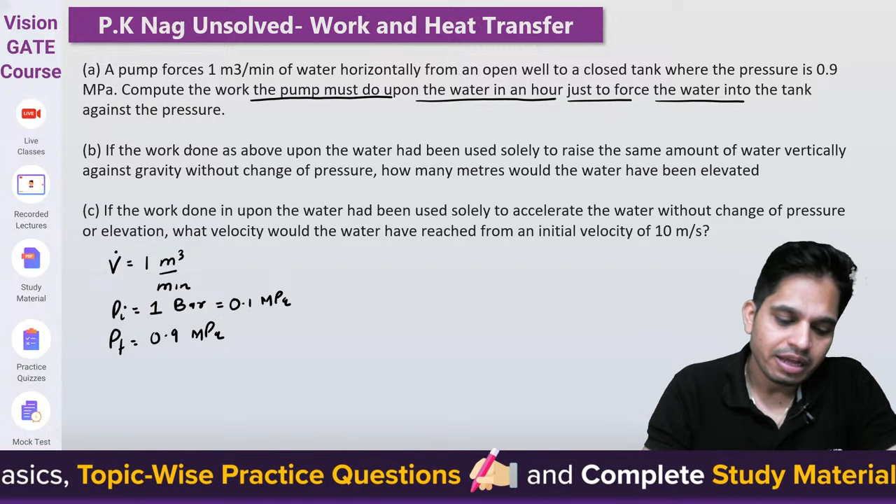First thing, second thing: instead of pumping it horizontally, if we are pumping it at a height, if the work done as above upon the water had been used solely to raise the same amount of water vertically against gravity without change of pressure - pressure remains same at 0.9 megapascal - so how many meters would the water have been elevated? Second question.

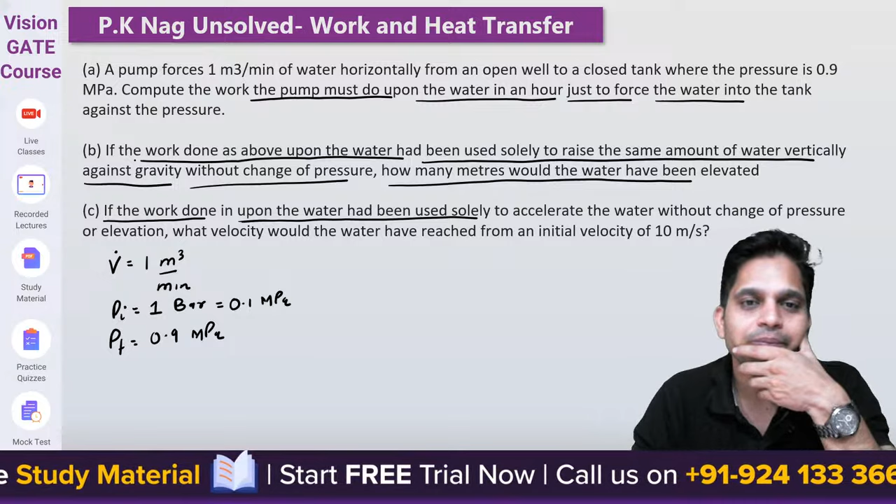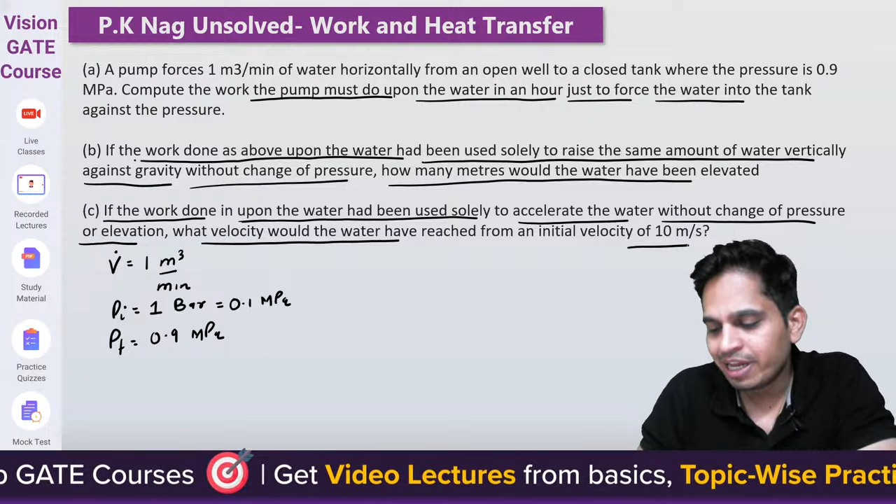Third, if the work done upon the water had been used solely to accelerate, that is you are increasing velocity only, without change of pressure or elevation - that is now you are not changing horizontally, you are not going vertically, you are giving all the work for increase in kinetic energy - then what will be the final velocity if initial velocity is 10 meter per second. So let's try to do the question one by one.

Okay, first part, A part. Volume flow rate is 1 meter cube per minute and initial pressure is 0.1 megapascal and final pressure is 0.9 megapascal.

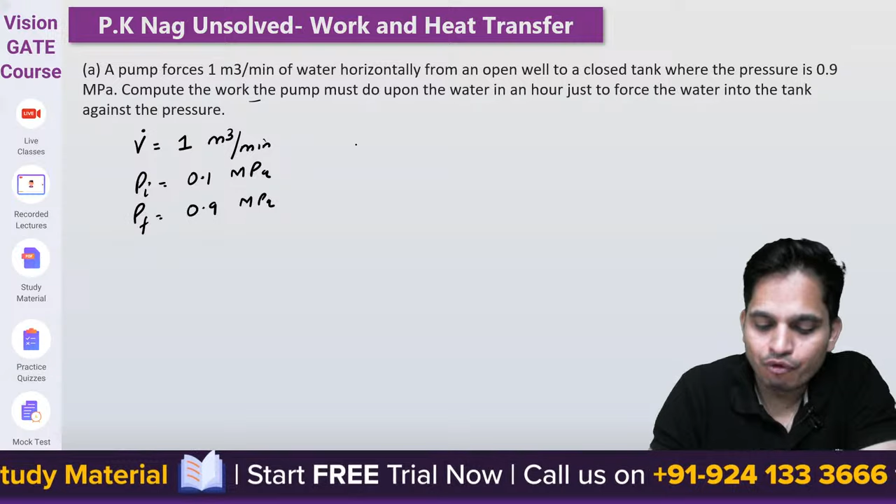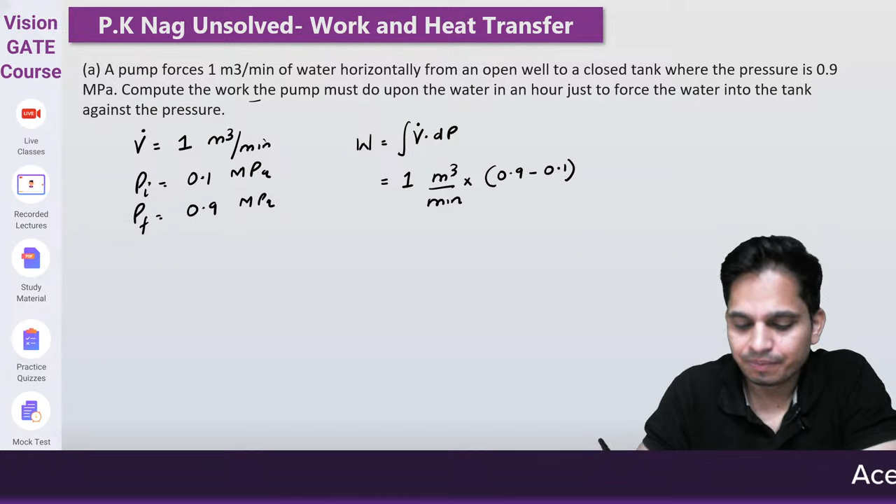Now if it is volume flow rate, so it will be in kilojoule per minute. Now, when we integrate, volume remains same, volume flow rate is same. So I can say it is 1 meter cube per minute into 0.9 minus 0.1 into 10 to the power 3 kilopascal. Calculate how much is this - it is 0.8 kilojoule per minute.

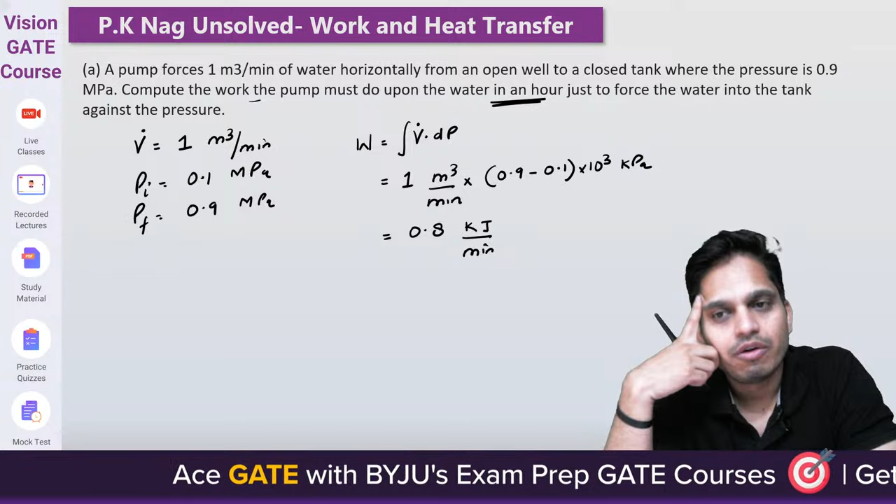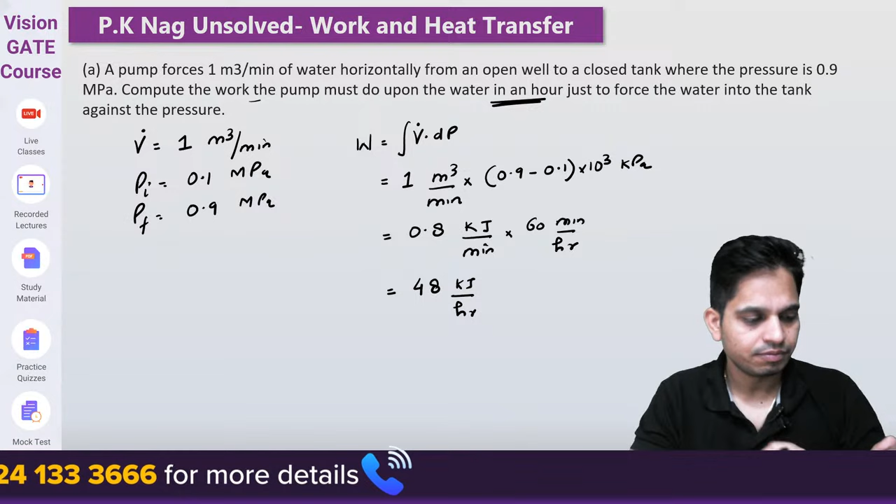But they are asking in an hour, that is, in 1 minute this much work you need to give. How much work you need to give in 1 hour? So into 60 minutes per hour. So you can calculate 48 kilojoule per hour. 48 is what we'll get, right? Yes or no? Yes, 48 kilojoule per hour.

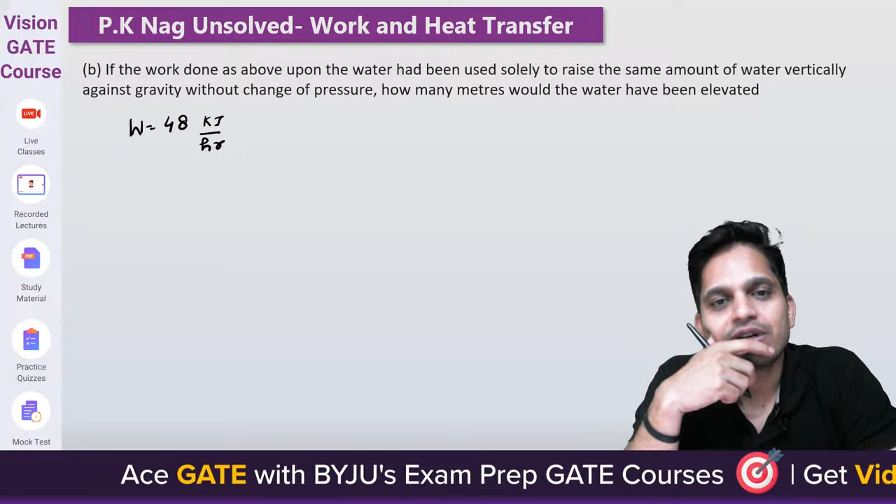Now the same work, that is work is 48 kilojoule per hour. 48 kilojoule per hour. For 1 minute, 0.8 into 10 to the power 3, this is 800, into 60.

48 into 10 to the power 3 kilojoule per hour.

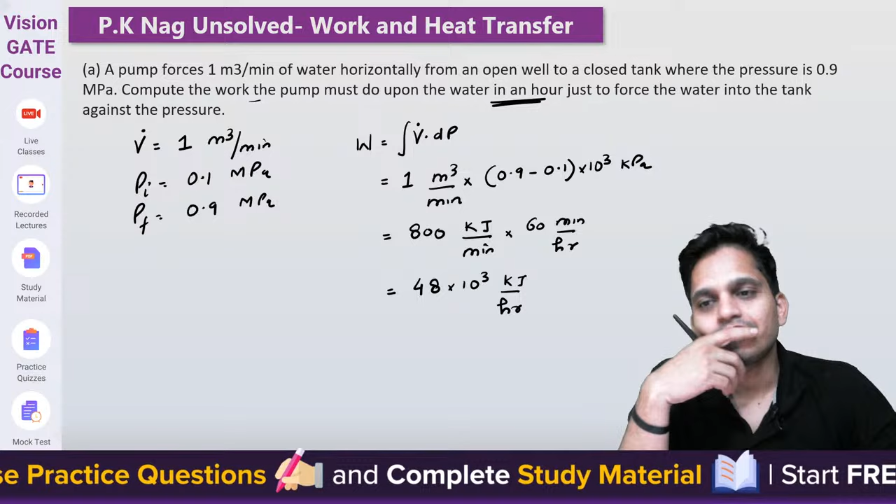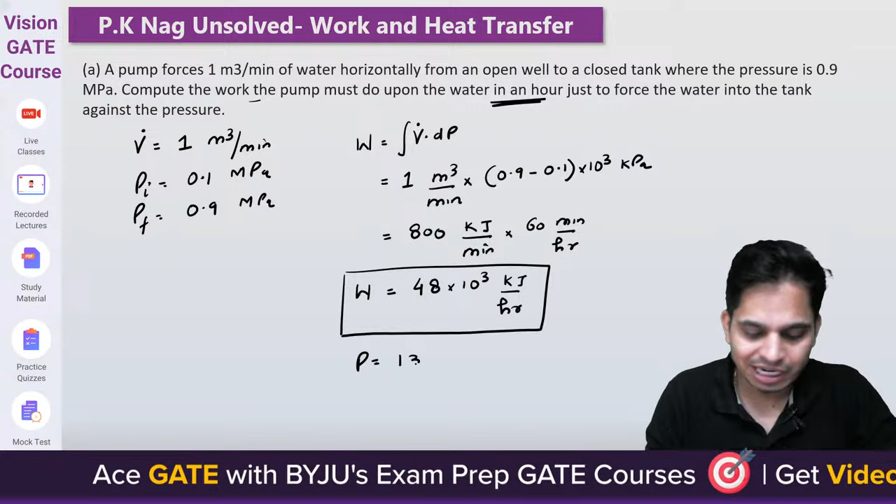We can find out kilojoule per second as well. How? Just divide by 3600. So they are asking this. But to calculate power, power is always in kilojoule per second, that is kilowatt. So it is 13.33 kilowatt. Power is 13.33 kilowatt.

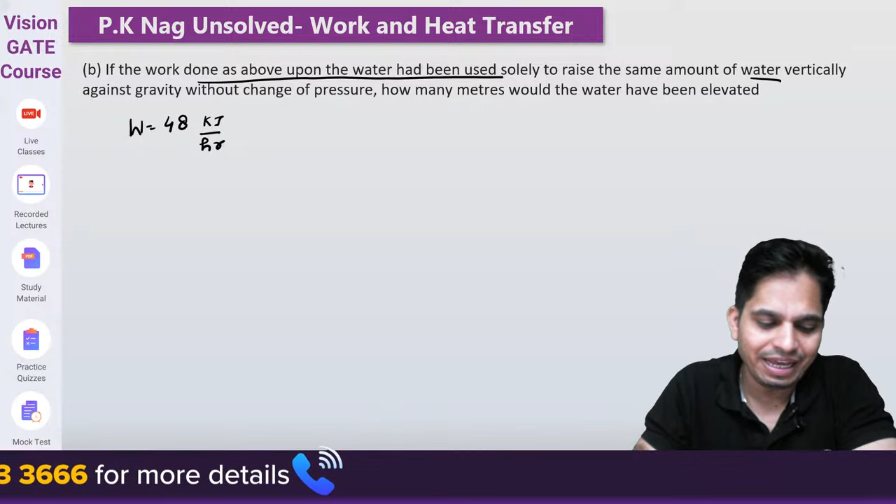Now, if the work done is given upon the water had been used solely to raise the same amount of water vertically against gravity without change of pressure, how many meters of water has been elevated?

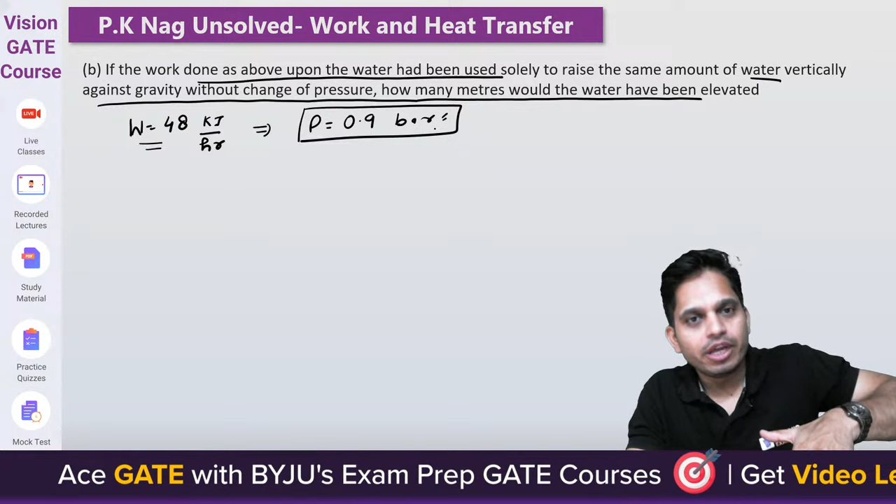This work I have given to raise the pressure to how much? Pressure to 0.9 megapascal. So now what do I have? I have 0.9 megapascal of pressure. The work is converted to pressure, right? I have given this work to convert into pressure. So this pressure is equivalent to what height? How can I calculate this?

P is equals to rho G H. P is 0.9 into 10 to the power, it is megapascal, right? Ten to the power 6. Density is 1000 into 9.81. So you can raise to this height. Calculate what is this height.

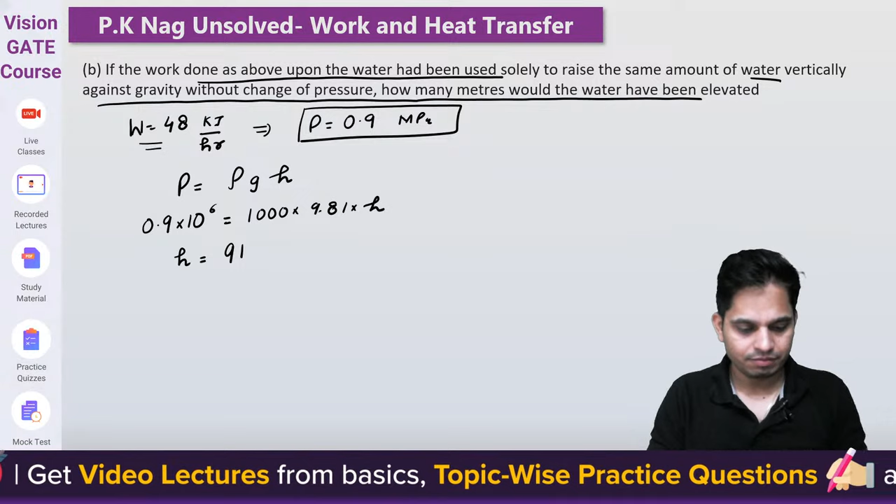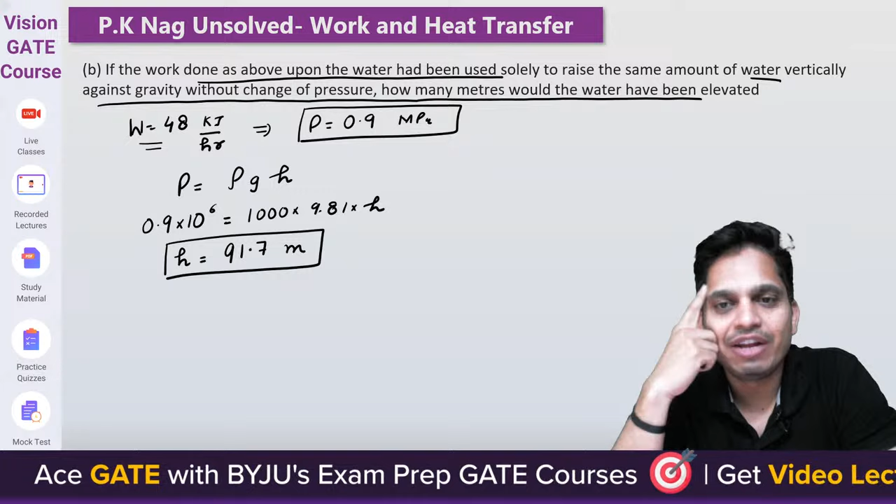Is it 917 or 91? It is 91.7. So the same work can be utilized to increase the height to 91 meters.

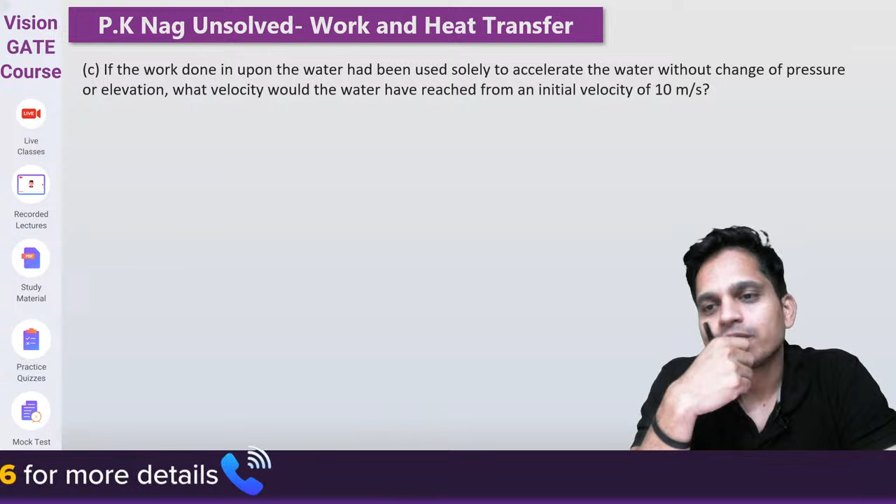Now, if you are giving the same amount of work to increase the velocity, then what will you do? By the same amount of work, you are going to increase the velocity. So what is kinetic energy? Kinetic energy is equals to m into v2 square minus v1 square, by 2.

Now I am giving this work to convert into kinetic energy. I am going to increase the kinetic energy by using this. So work is what? Can I say work is V delta P, and what is mass? Mass is density into volume.

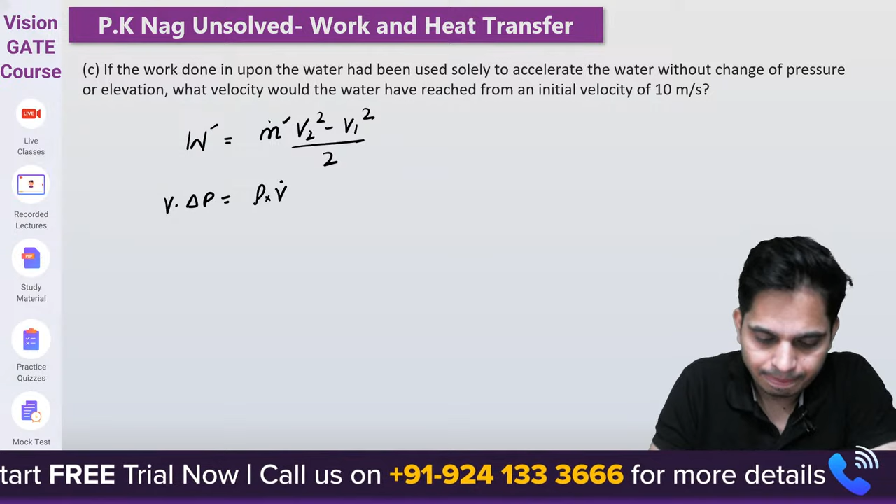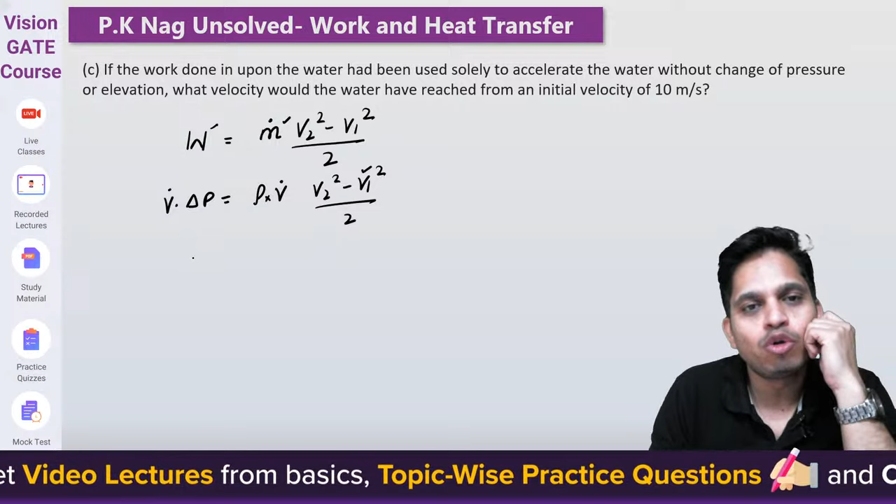V2 square minus V1 square by 2. Now V1 is given to me. I need to find out V2. Or you can directly write down work, no problem, whatever you want. Here I just want to cancel it. That's why I wrote it like this.

Now delta P is 0.9 minus 0.1 into 10 to the power 6 is equals to 1000 into V2. I need to find out V2. V1 is given as 10 meter per second. Calculate V2. How much is V2?

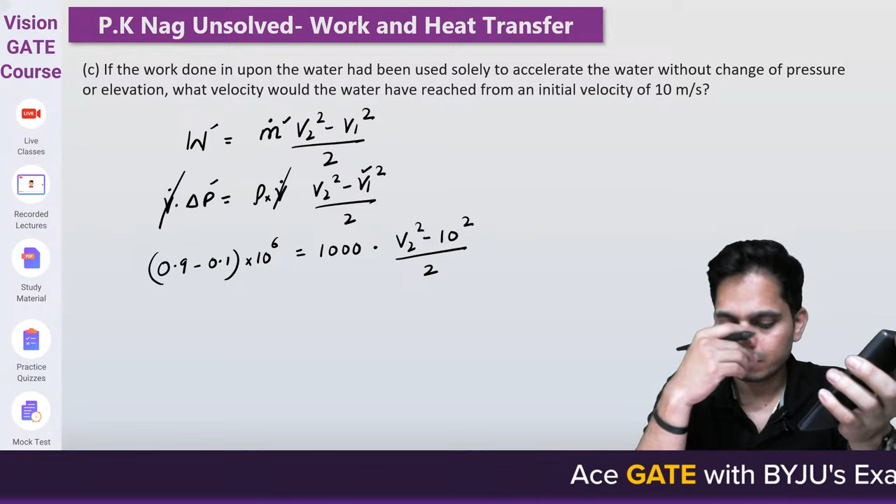It will be ten to the power 6, because velocity is in meter per second. So whenever velocity is there, you need to take pressure into Pascal. Otherwise, if you want to take pressure into kilopascal, then you need to divide velocity, like here it is 2, so you need to do 2000.

Got it? What is the answer? What is the velocity? I am getting 41.23 meter per second. Are you getting this?

This is right, I have calculated it just now. I have calculated 41.23. Same equation I have put. Just recalculate it again.

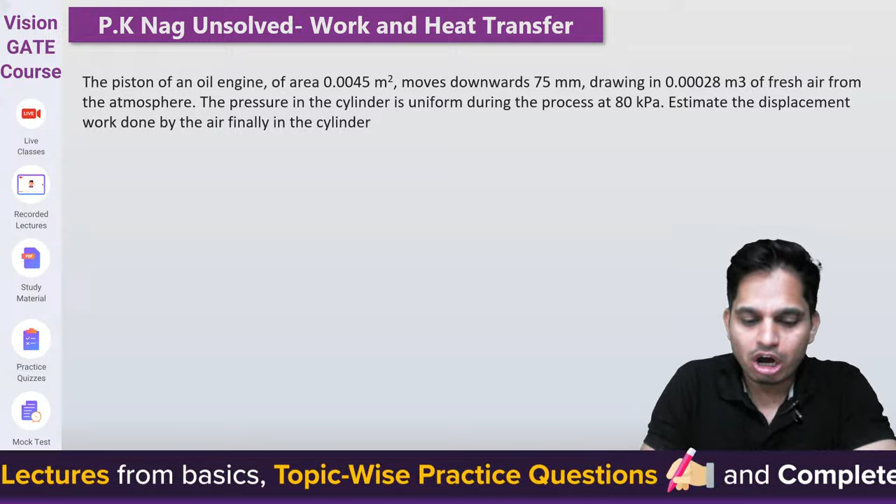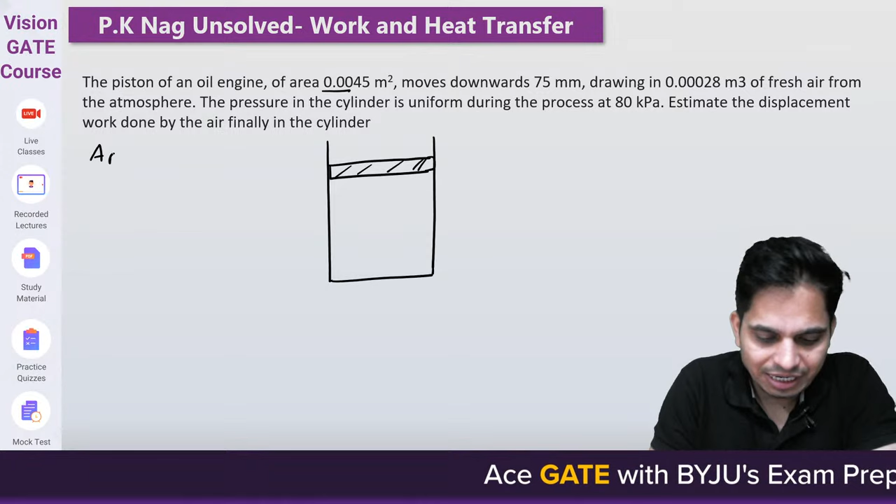The piston of an oil engine of area... So I have an engine, and I have a piston. The area of this piston is 0.0045 meter square, and it moves downward.

Yes, you can directly put it, you can directly put it. Then just you have to put volume flow rate here. That's all, I wanted to cancel volume flow rate, that's why I just did that. You can directly put work, yes of course you can put.

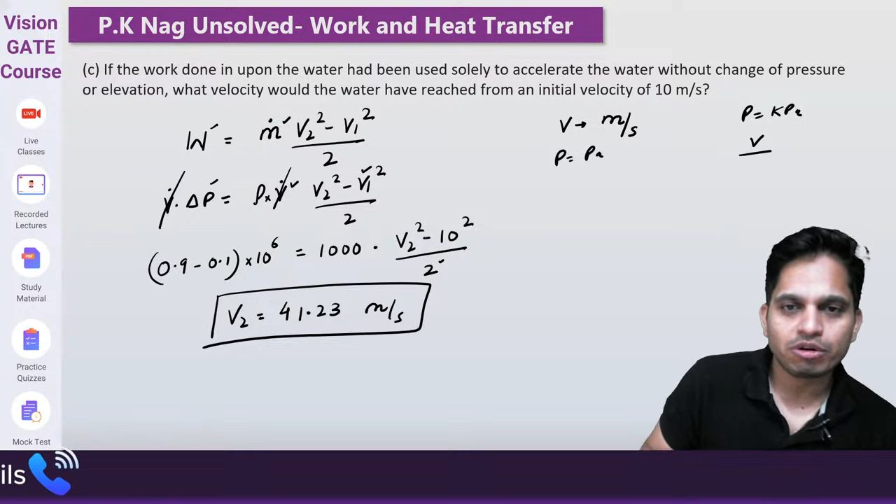Now, it moves downward to 75 millimeter, so it comes here. So travel is how much? 0.075 meter, drawing in 0.00028 meter cube of fresh air. How much volume has entered? 0.00028 meter cube from the atmosphere.

The pressure in the cylinder is uniform, pressure remains same. Pressure is equals to 80 kilopascal. Estimate the displacement work done by the air finally in the cylinder.

I have no knowledge of that, Anu. I am sorry, I have no knowledge of board of trade. I really don't know.

Okay, let's discuss what we are discussing. Now...

So they are asking about piston displacement work. Do you all know what is piston displacement work? It is PdV, PdV.

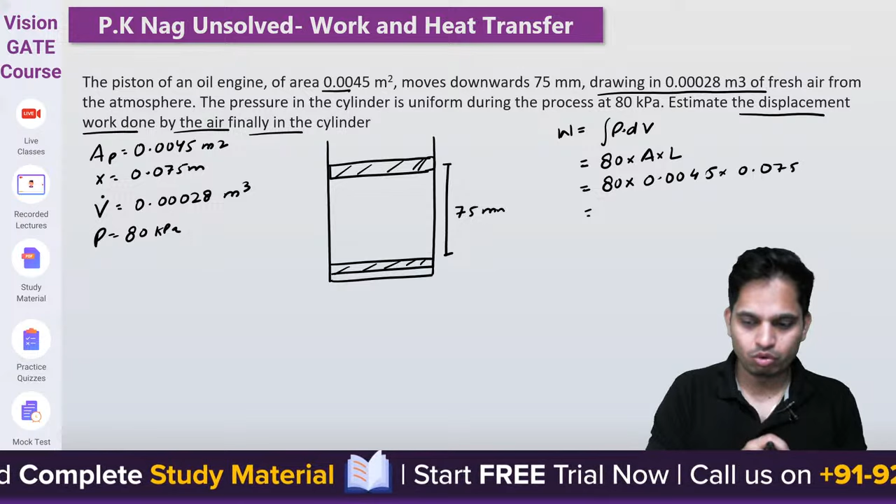And what is the change in volume? Pressure is 80 kilopascal. Change in volume is area into length. So 80 into 0.0045 into 0.075. If you calculate that, you get 0.027 kilojoule, which is the piston displacement work.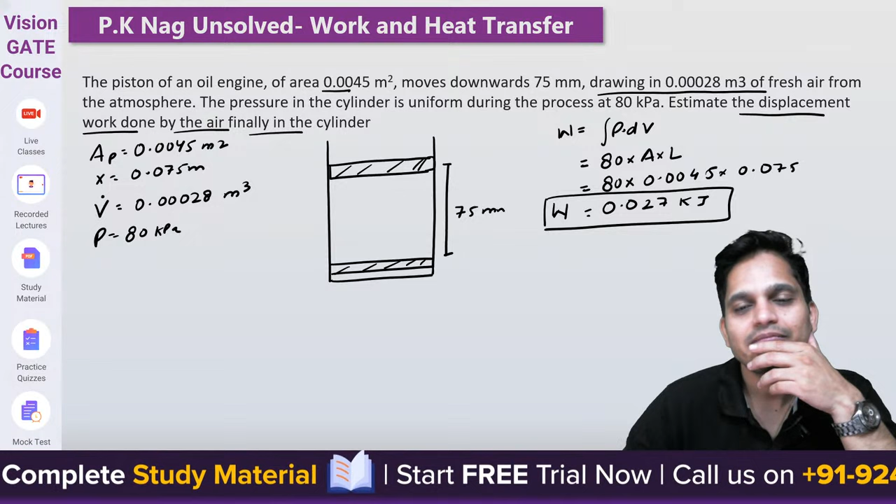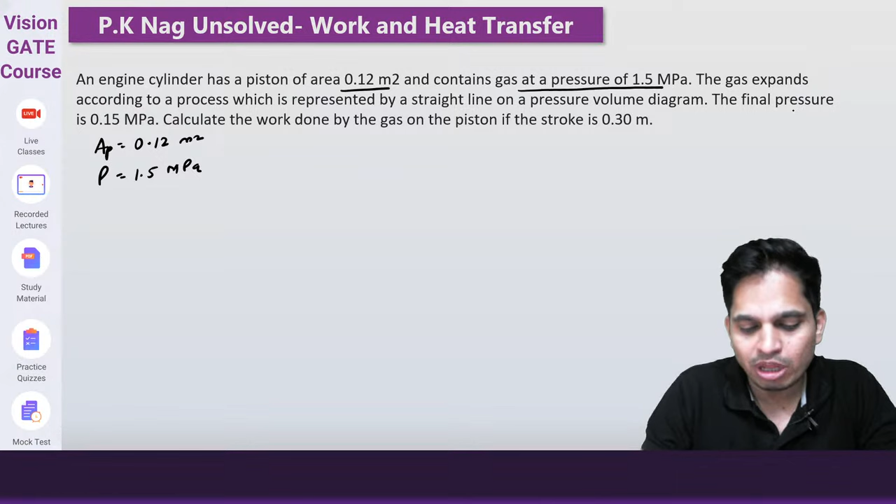Let's go to next question. An engine cylinder has a piston area given as 0.12 meter square and contains gas at a pressure of 1.5 megapascal. Now the gas expands according to the process which is represented by a straight line on a pressure-volume diagram. So this is P1, and your final pressure is 0.15 megapascal.

And how are you going from this to this? You are going from P1 equals 1.5 megapascal to P2 equals 0.15 megapascal. This point you are going by a straight line. Yes, 0.027 is the correct answer for the previous question.

So this is your initial pressure and this is your final pressure. Now the gas expands through this. Now they are asking, calculate the work done on the piston if the stroke is 0.3 meter.

Stroke means length, that is change in volume. So change in volume will be area into length. Area is 0.12, length is 0.3. What is the change in volume? It comes out to 0.036 meter cube.

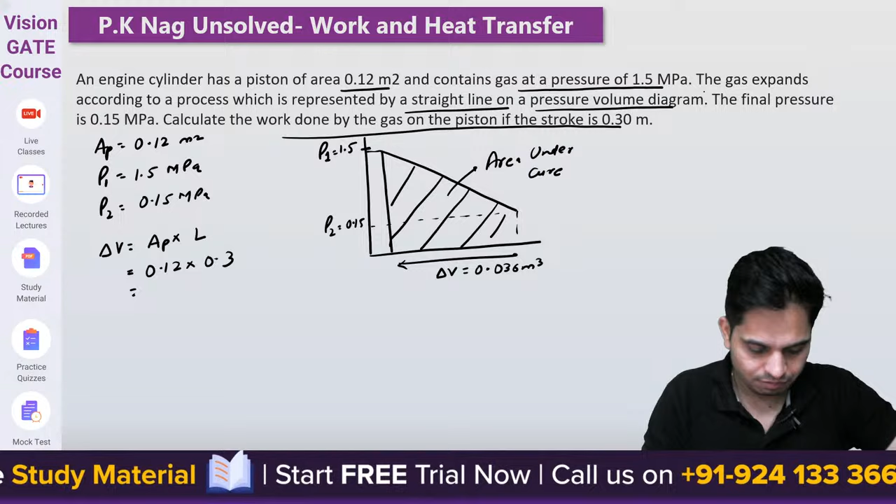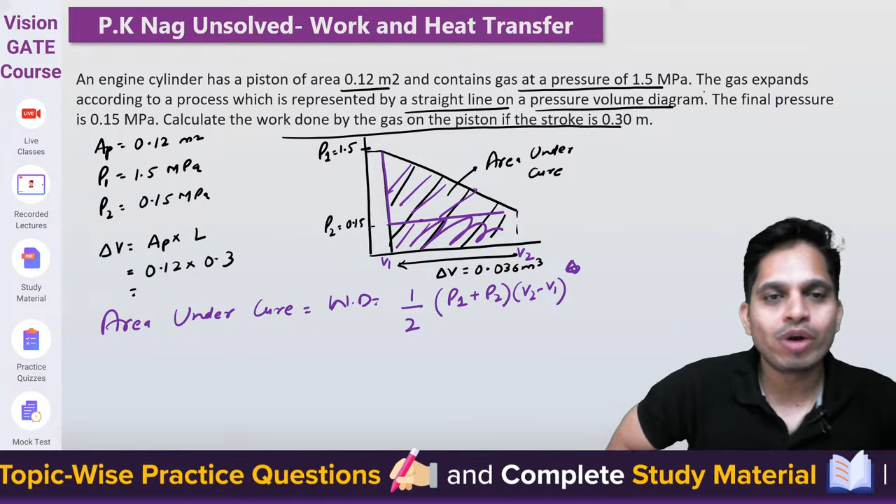So area under curve equals work done equals half into P1 plus P2 into V2 minus V1. If this is my V2, this is my V1, so V2 minus V1. If you calculate the area of triangle and area of rectangle, you will get this same expression. You can try that yourself.

Now, half into 1.5 plus 0.15 into 0.036. How much is the answer?

0.0297 megajoule. Yes or no?

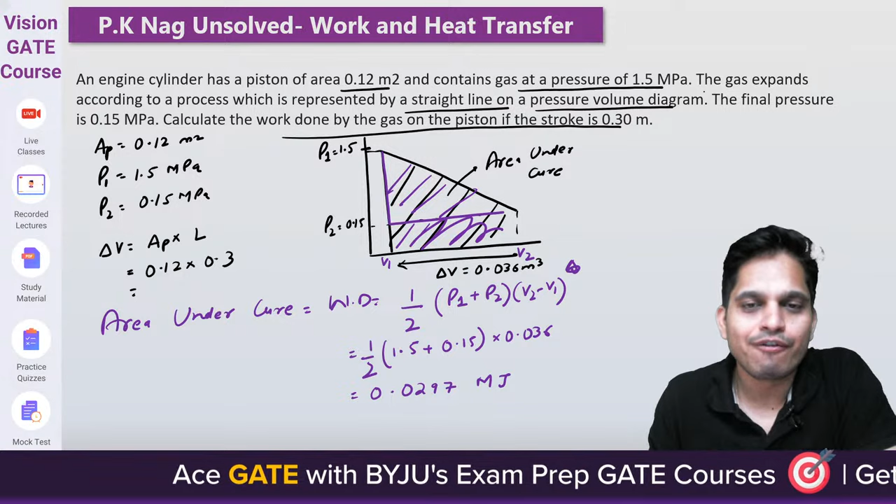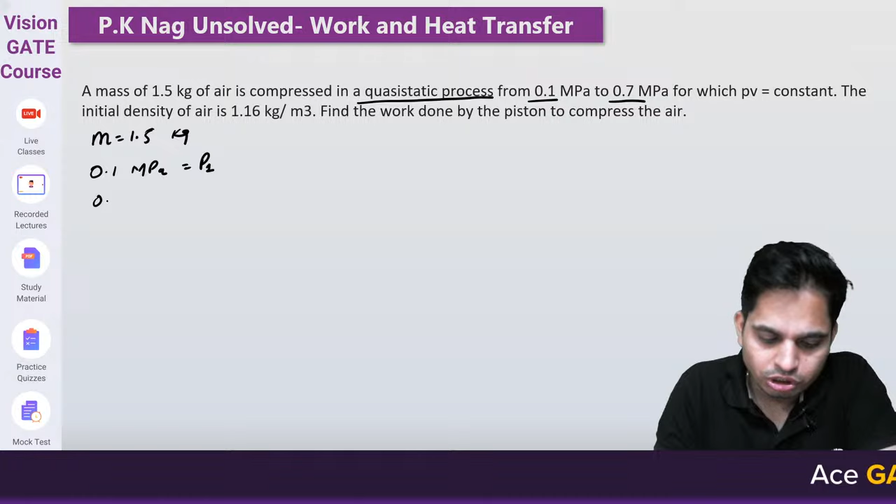A mass of 1.5 kg of air is compressed in a quasi-static process from 0.1 megapascal (P1) to 0.7 megapascal (P2). How? PV equals constant. Which process is this where PV equals constant?

The initial density of air is given as 1.16 kg per meter cube. Find the work done by piston to compress the air. What is this process where PV equals constant?

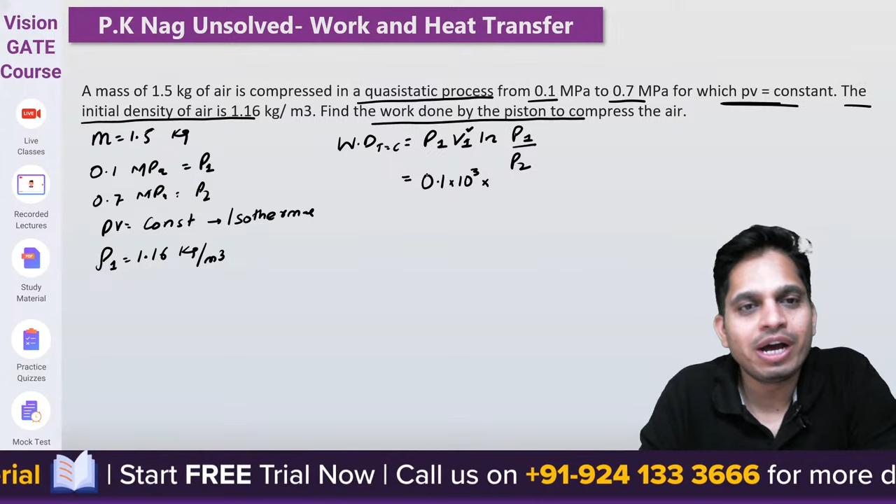Now I know P1. P1 is 0.1 into 10 to the power 3 into volume. Now how can I find V1? Arre, mass is given, density is given. So mass per unit density is my volume.

ln(P1/P2) is ln(0.1 upon 0.7). Whatever you are going to get, you will get in kilojoule. Tell me how much is it?

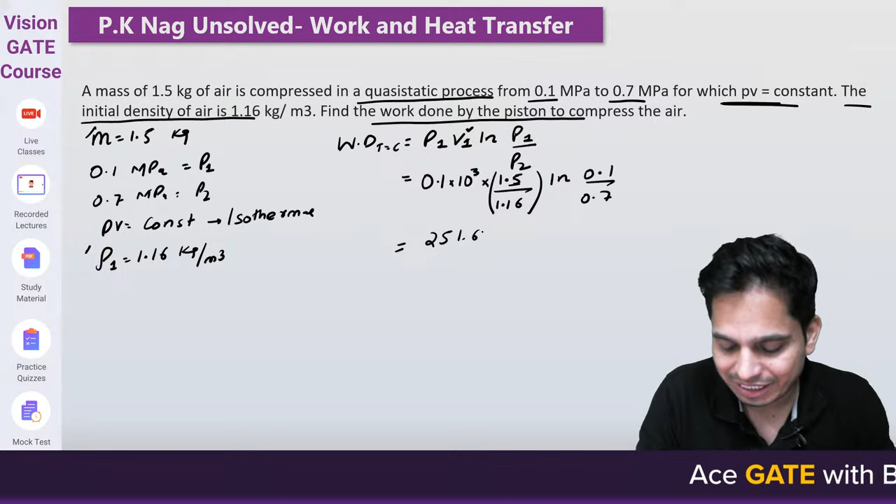Anyone else? How much are you getting? 251 is correct, 251.67 kilojoule, that too minus.

So it is work of compression, work of compression to minus. This equation will automatically give you minus if it is work of compression.

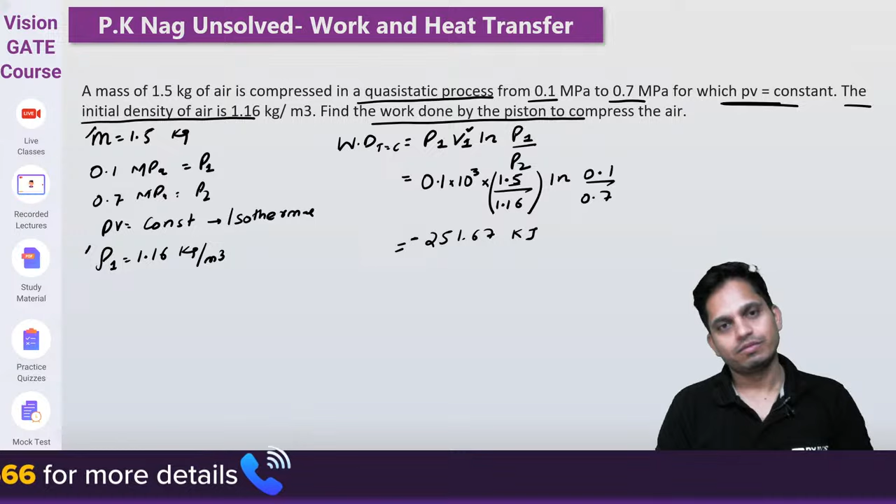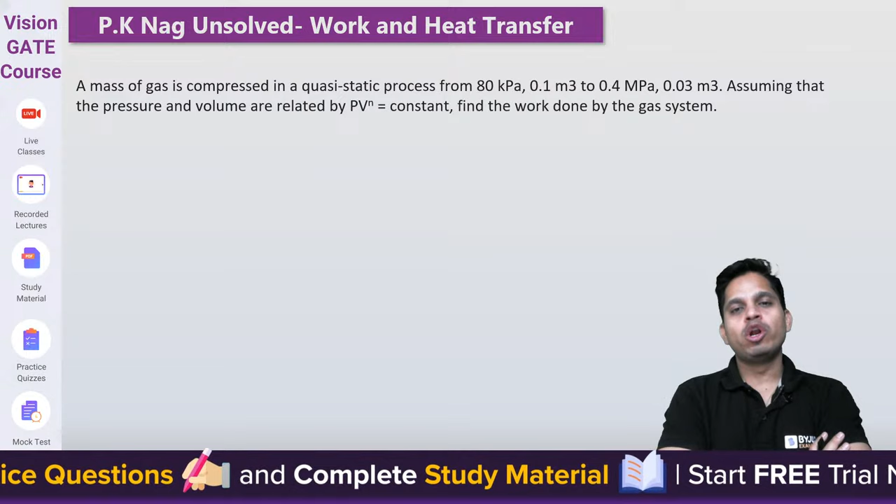Chalo, now this you can do in homework based on the same concept we have discussed. I will share the PPT in my Telegram group. Try this question on the same concept that we have discussed.

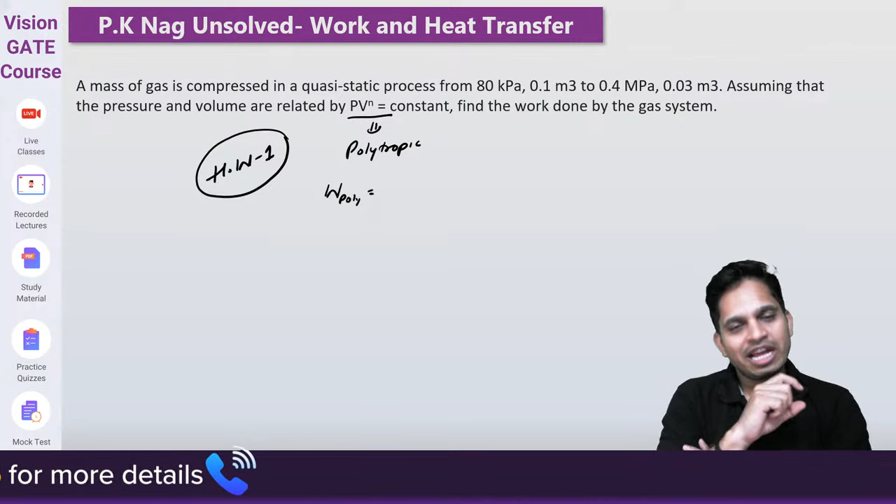What is this process, Baba? Polytropic process. So I hope that you remember how to calculate work in a polytropic process. If not, go to the concepts where, if you have studied with me or you have made your own notes, if you don't remember, go to the formula or your short notes table and find out what formula you use to calculate work for polytropic process.

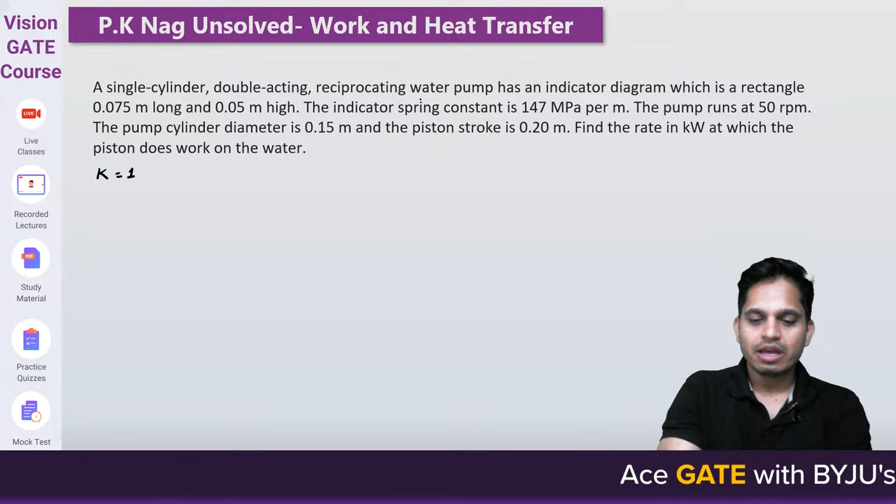Okay, chalo, let's go to next question. Now, a single cylinder, yani ki n is equals to 1, double acting k is equals to 1, basically k is equals to 1, double acting means both side compression, both side expansion. Reciprocating water pump has an indicator diagram which is rectangle. So I have an indicator diagram PV, it is rectangle.

Point zero seven five and height is point zero five. So what does this area give me? This area is equals to zero point zero seven five into zero point... this is the area of the indicator diagram. Area of the...

To bhaiya practice karo, bahut zaroori hai. Manikeet, I have seen you many times, you know things but still you do wrong. Calculation is something that you need to work on.

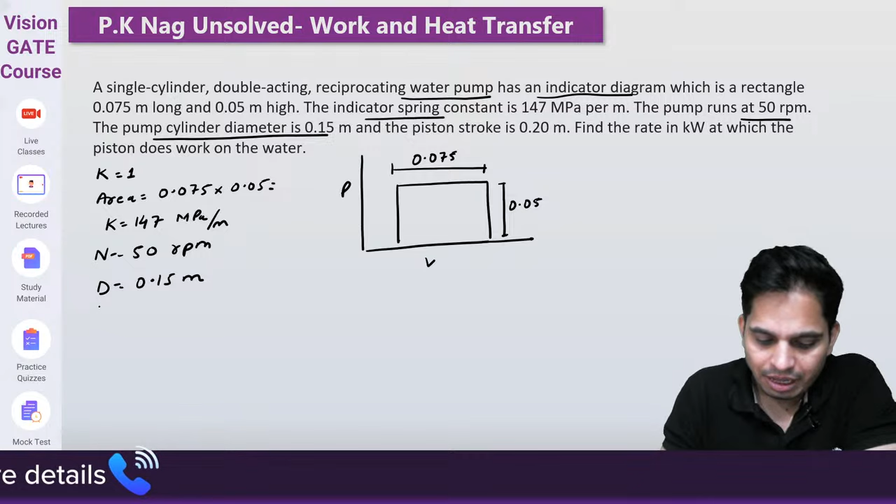Okay, chalo. The indicator spring constant K is equals to 147 megapascal per meter. The pump runs at N is equals to 50 RPM. Pump cylinder dia is this, yani ki dia is 0.15 meter and length is 0.2 meter. Find the rate in kilowatt at which the piston does work on the water.

So what do you need to find out? You need to find out indicated power. And we give indicated power as...

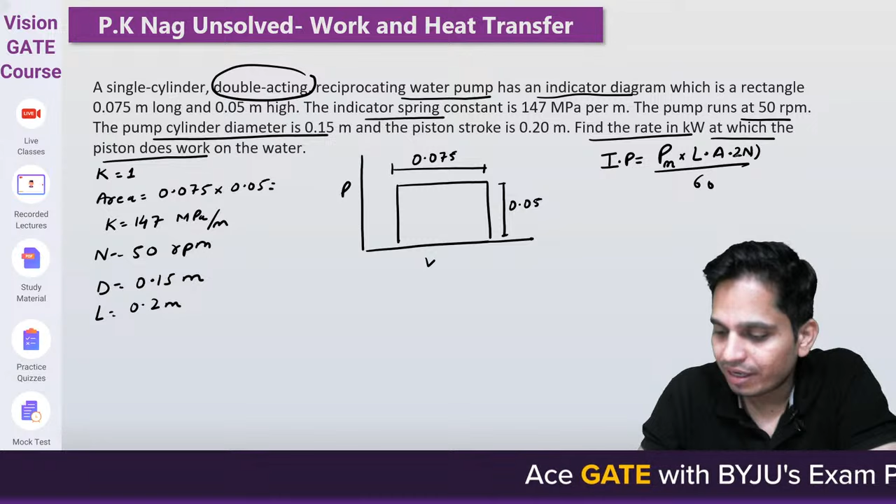Thik hai, chalo. So indicated power is equals to PM. What is length? 0.2. What is area? Pi by 4 d square. 2 into 50 by 60. By 60.

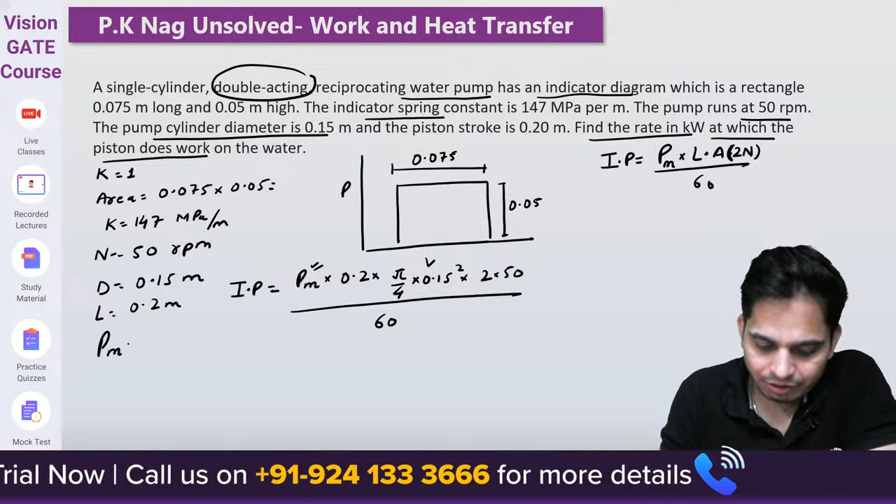Now sir, how will you calculate mean effective pressure? So mean effective pressure is given by, when spring constant is given, it is given by area by length. Area of the indicated diagram by length of the indicated diagram, into spring constant K.

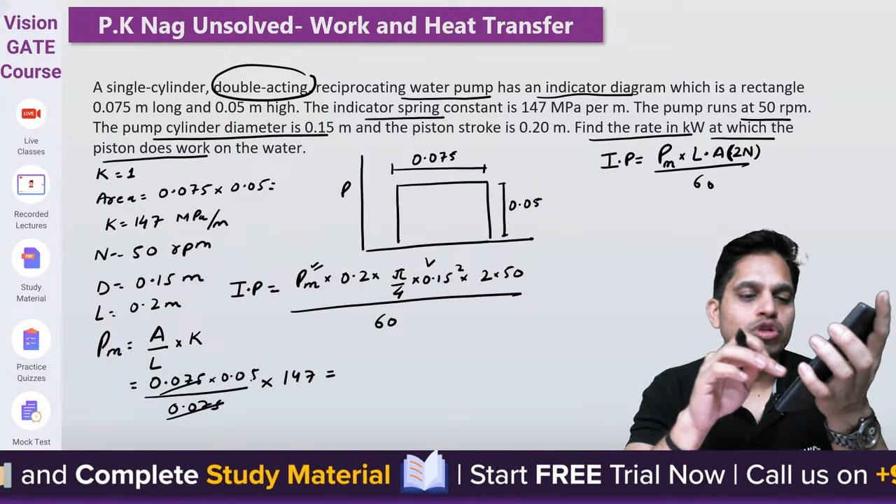So tell me what is mean effective pressure? Area is 0.075 into 0.05 upon length is 0.075, into 147. Tell me how much is it? How much is mean effective pressure? One forty-seven into 0.05... 7.35 megapascal. Chalo rakh do yahan pe fatafat.

Rakh do upar wali equation mein. 7.35 into 10 to the power 6, into 0.2 into 0.285. What is pi by 4? 0.285. I think that is correct.

Calculate quickly, calculate quickly. Okay, 0.785, this is 0.785. Sorry, pi by 4 is 0.785.

Chalo nikalo jaldi. 0.2 into 10 to the power 6 into 7.35 into 0.15 square into 2 into 50 divide by 60. Kitna aa raha hai? 43295.0 joules, yes. Aur 43.29, sorry watt, yes, very good.

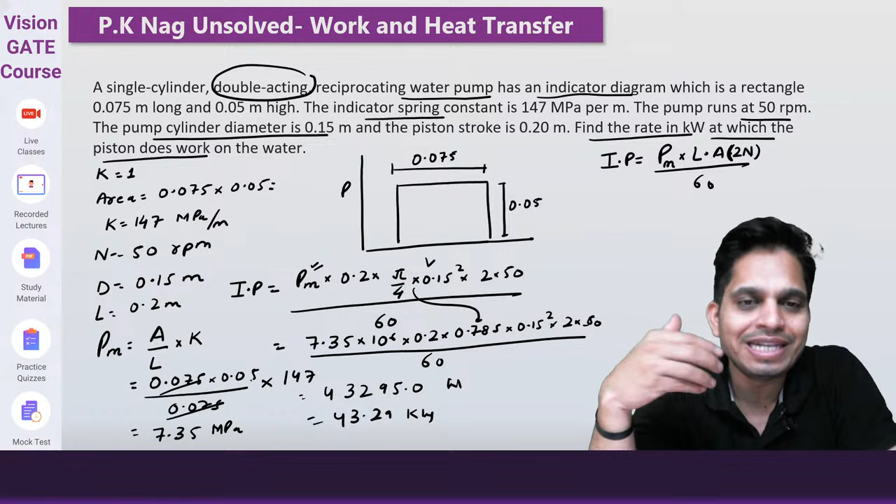गाइस ये पी के नाग अगर कर लोगे तो थर्मोडायनेमिक्स में कोई नहीं रोक सकता. इतना ध्यान रखना. पी के नाग is the one stop solution for thermodynamics. It opens so many concepts if you just focus on P के नाग from numerical point of view, from practice questions point of view. I will try to bring as many sessions as possible, and I will try to do all the topics in P के नाग. Okay, so keep joining. चलो next question.

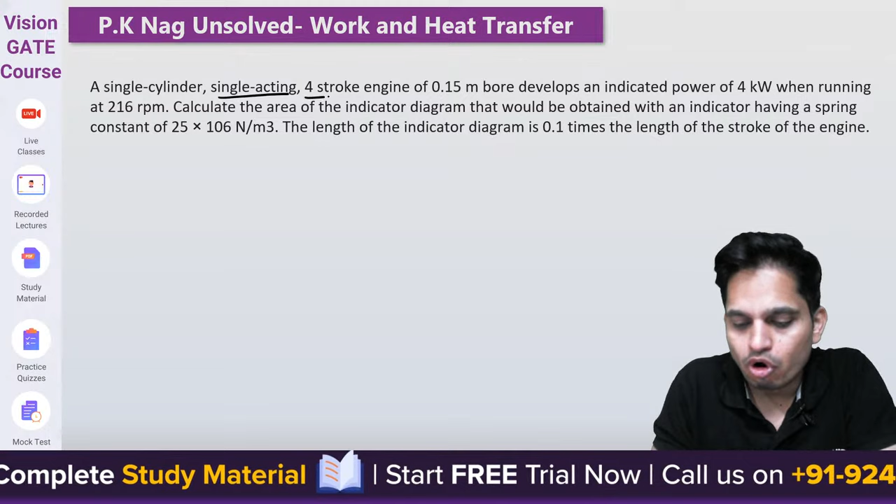Similar question. A single cylinder, single acting. Now N will be equal to simple, 4 stroke. Dia कितना है? Dia is equals to 0.15 meter. Develops an indicated power

of 4 kilowatt when running at 216 rpm. Calculate the area of indicator diagram that would be obtained when an indicator having a spring constant. Spring constant is how much? K is equals to 25 megapascal, or you can say 25 into 10 to the power 6 Pascal.

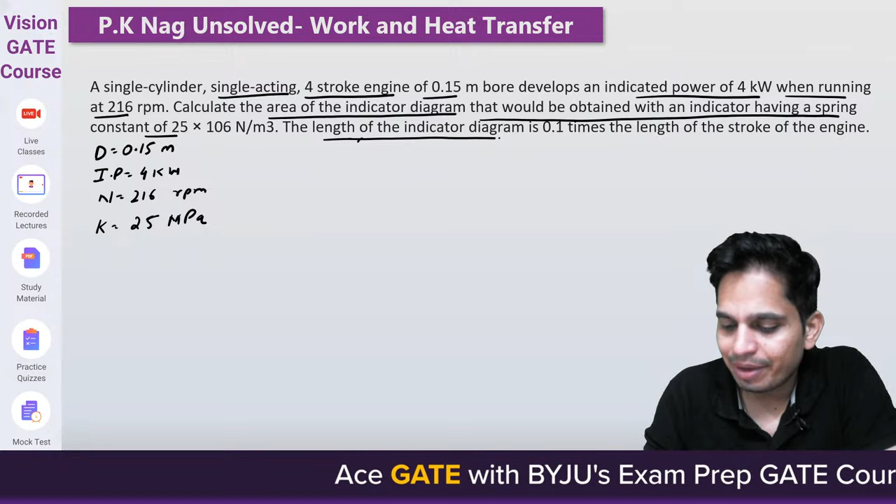Simple. The length of the indicator diagram is, so length is equals to 0.1 times of length of stroke.

Yeah, same question, a little bit concept is going to change. Same formula. Sir, indicated power is equals to mean effective pressure into L, N, A, into A L N.

बाई 60 आएगा 120 आएगा? 120 because 4 stroke.

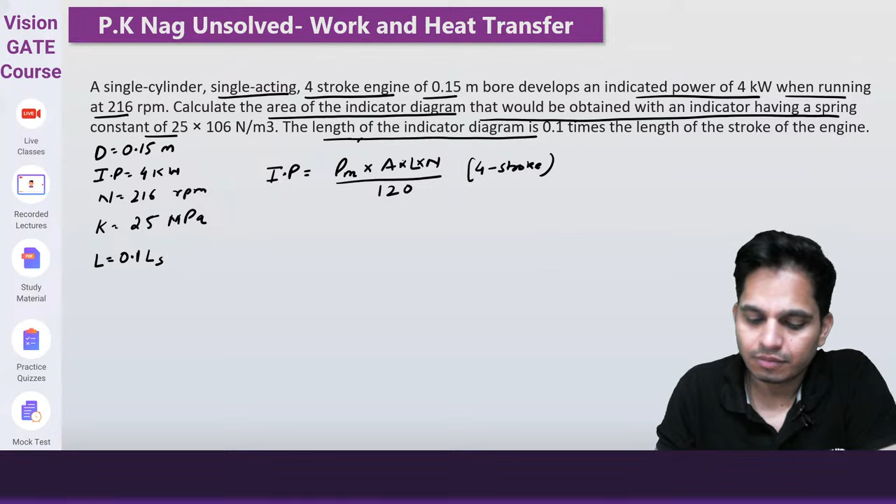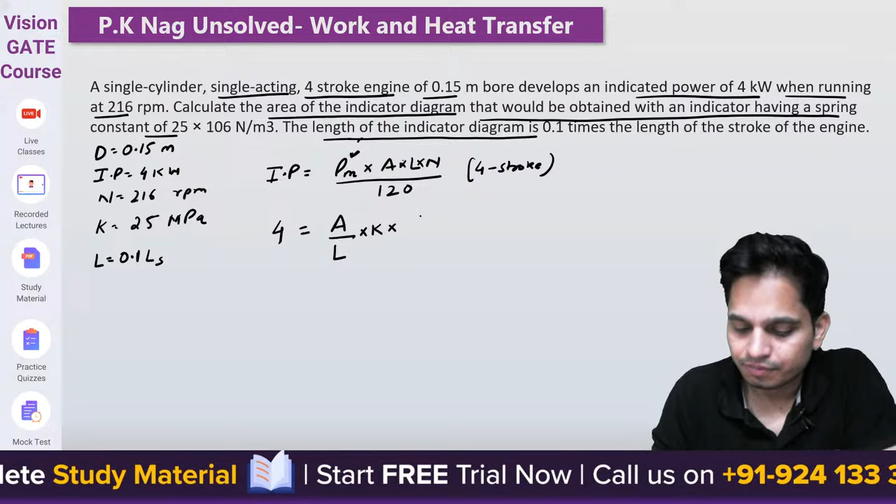Now this is given as 4 kilowatt. This will be, just now we have seen area of indicator diagram by length of indicator diagram into K into area. This is what? This pi by 4 d square into length. What is this length? L, length of stroke, into n by 120.

Now they are saying, sir, this length is equals to 0.1 ls. That means this and this will get cancelled. I need to find out area of indicator diagram. So I will say 4 into 0.1 into 4 into 120 upon pi into k into d square into n. I know everything.

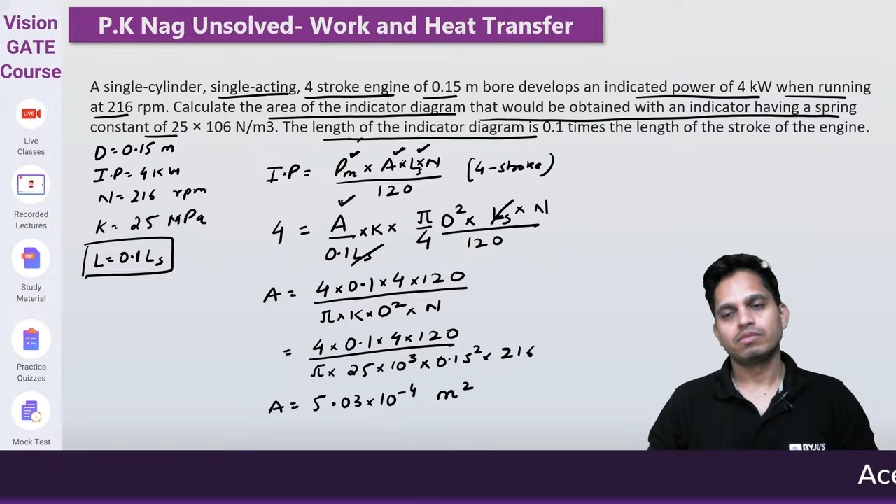कितना आ रहा है? आ रहा है इतना? नहीं आ रहा? आ रहा है 0.005 और एक दो जीरो आएंगे बाबा, 3 जीरो आएंगे, 3 जीरो आएंगे जब 5 आएगा.

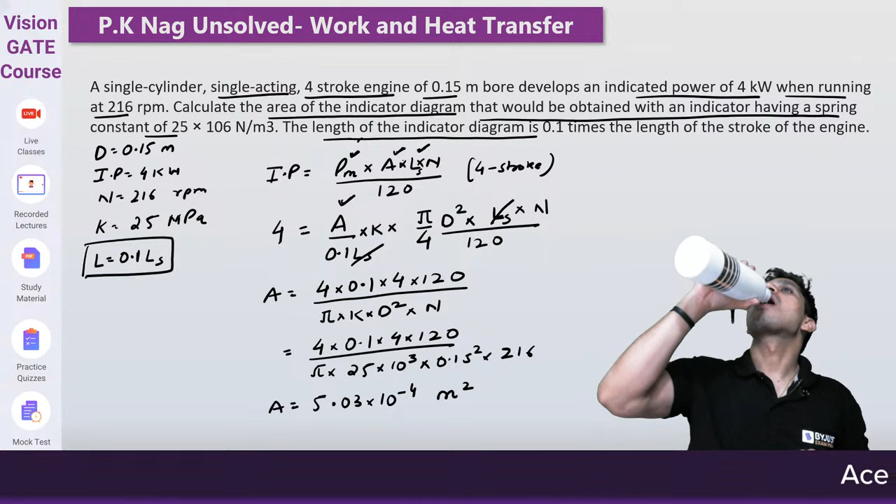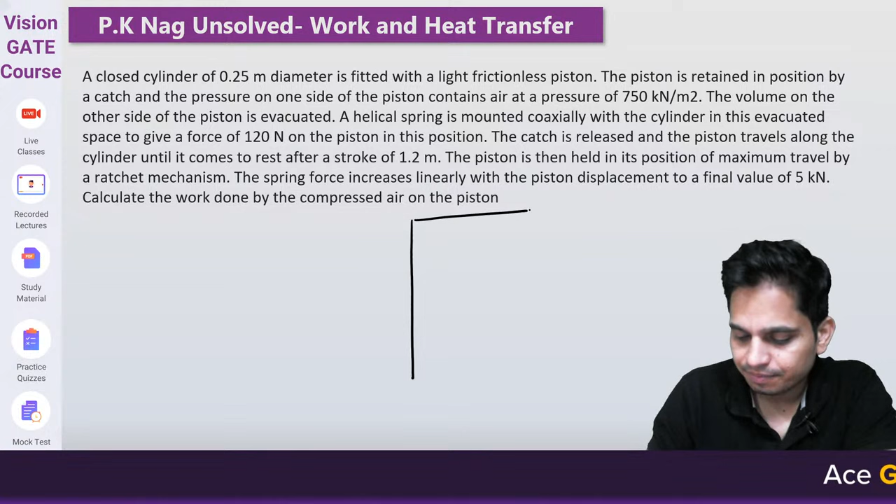चलो नेक्स्ट क्वेश्चन देखते हैं. इंपॉर्टेंट क्वेश्चन. अ क्लोज सिलेंडर of 0.25 meter dia is fitted with a, so I have a closed cylinder with dia how much?

Guys, important question है, focus is fitted with a frictionless, light means massless, frictionless piston. The piston is retained in position by a catch on one side of the piston contains, so here the pressure is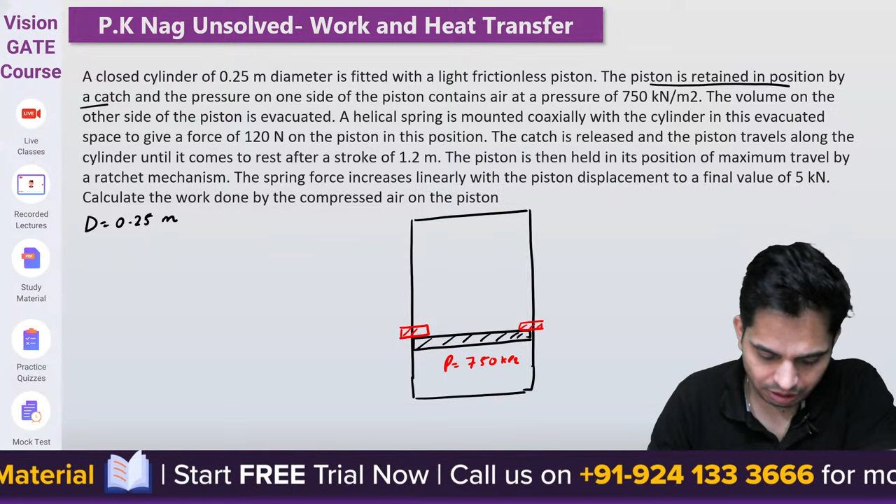750 kilopascal. The volume on the other side is evacuated. Now a helical spring is mounted coaxially with the cylinder in this evacuated space to give force.

Initial force कितना लग रहा है इस पे? 120 न्यूटन. Initially force कितना लग रहा है? 120 न्यूटन. When you are here, force is 120 Newton.

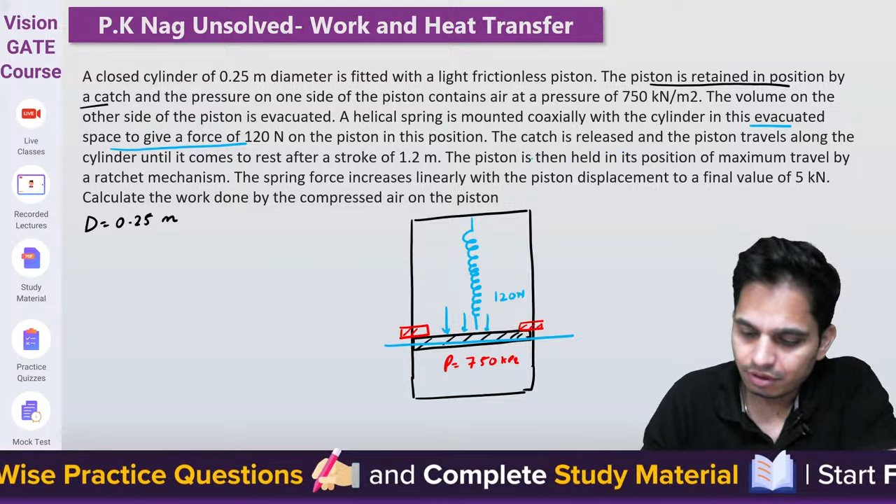The catch, now you remove this stoppers. Okay, now you remove this catch. And then

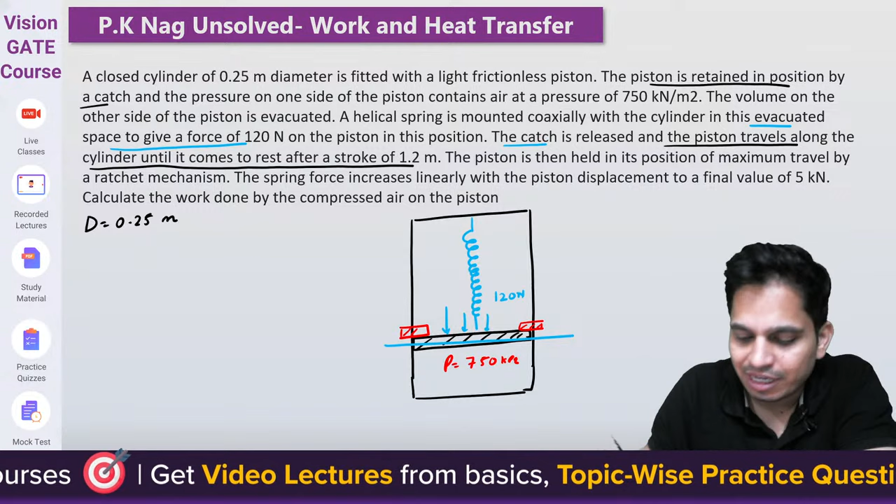piston travels along the cylinder until it comes to rest after 1.2 meter. That means piston moves up and it comes to rest here. How much it has traveled? 1.2 meter it has traveled.

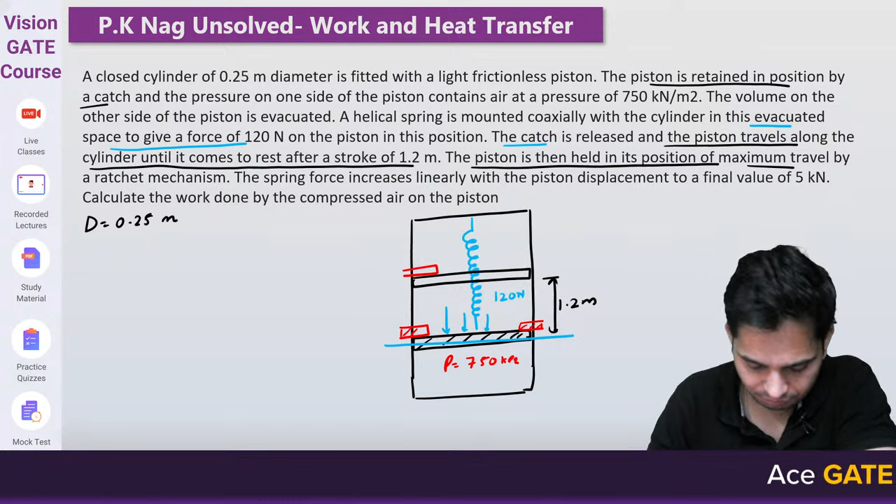The piston is then held in its position of maximum travel by a ratchet mechanism. So now again you stop it.

The spring force increases linearly with the piston displacement. That means if I need to draw my force and displacement, then it is linearly increasing. So how is it increasing? Linearly to a final value of 5 kilonewton.

So see, by here x is equals to 0, here x is equals to 1.2. Let us say here at x is equals to 0, force is 120 Newton. And when x is equals to 1.2, force is 5000 Newton.

Now what are they asking? Calculate the work done. करो सॉल्व. कितना आ रहा है? करो कितना आ रहा है?

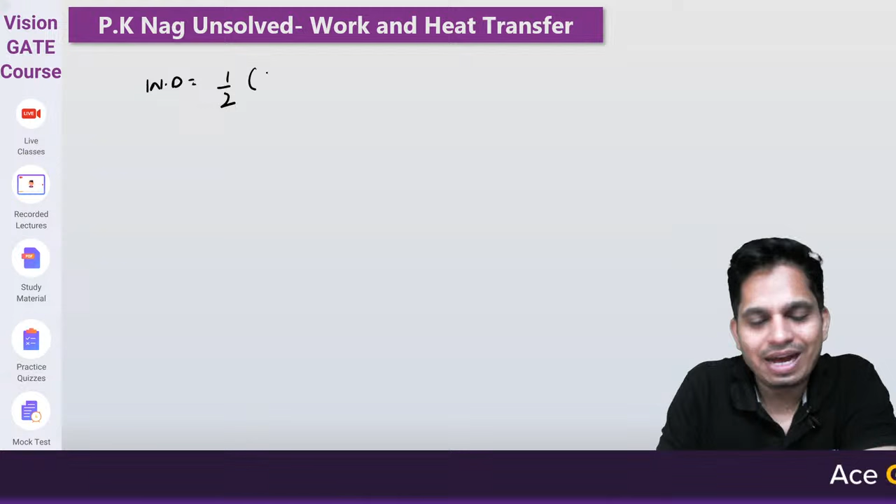दो तरीके से कर सकते हैं इसे. पहले तो क्वेश्चन समझना ही जरूरी है. ठीक है. अब जब समझ आ गया तो वर्क डन आ गया मेरा सर हाफ क्या आएगा? F1 प्लस F2 इंटू डेल्टा एक्स. 5000 प्लस 120 इंटू 1.2.

कर लो कैलकुलेट. कैलकुलेट कर लो.

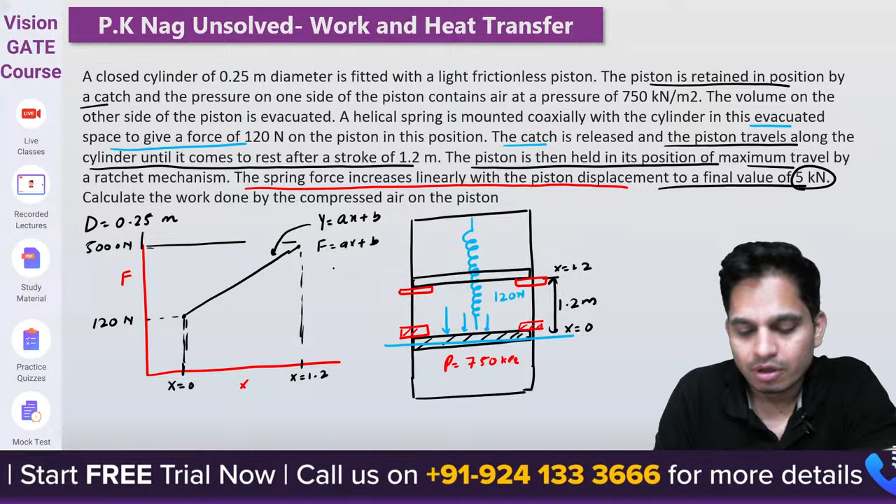So by what is the force equation? What is the work done? Work done is equals to force into dx, F into dx.

And force, I need to find out the relationship. What is this force? Ax plus b, so I need to find out A and B value. How can I find out A and B value? Force is equals to Ax plus b.

Now I have two conditions. First condition is when force is 120, x is 0. So from here b is equals to 120.

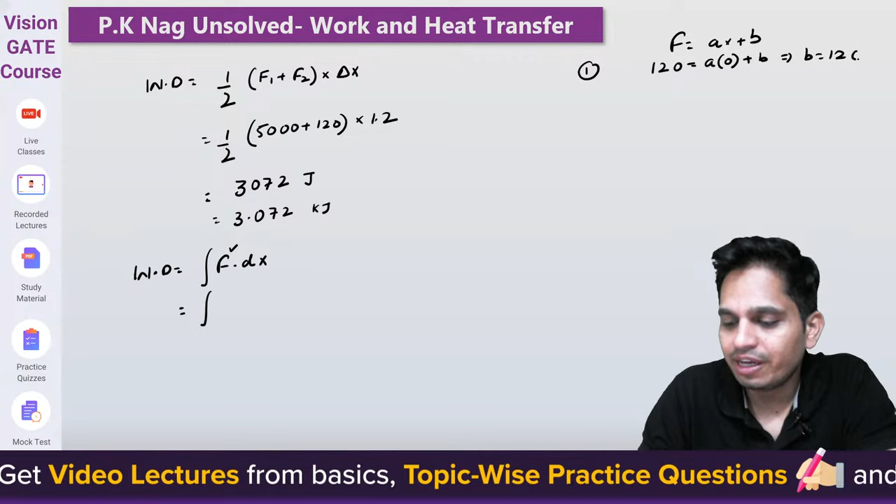Second, when force is 5000, x is 1.2. Now b we already found out, 120. So how much is A? 5000 minus 120 divided by 1.2.

4067. So now my equation of F is equals to 4067x plus 120. So this is my general equation.

How this is changing with respect to x. How it is changing? 120 plus 4067x, that is how it is changing.

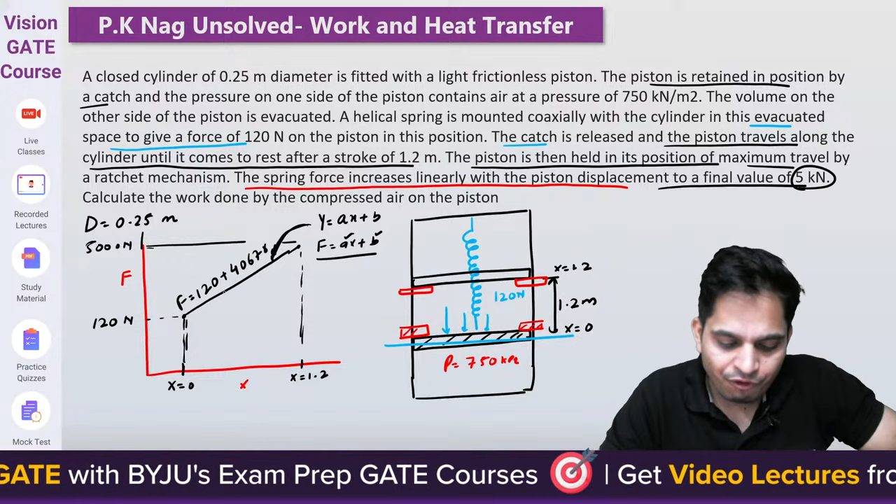Now I can find out x at every point, and then I can find out area. So what I need to do? I will just integrate it from x1 to x2.

4067x plus 120 into dx you do, and this is 4067 x square by 2 plus 120x, from x1 to x2. So x1 is what?

0. This is 1.2. So you can substitute. When you put 0, it will be 0. But I can do 4067 into 1.2 square by 2 plus 120 into 1.2 minus 0, minus 0.

So work done can be found out as how? How can we find out how much is the work done? Same work done you are going to get. Same work done, no change in work done. Yes or no?